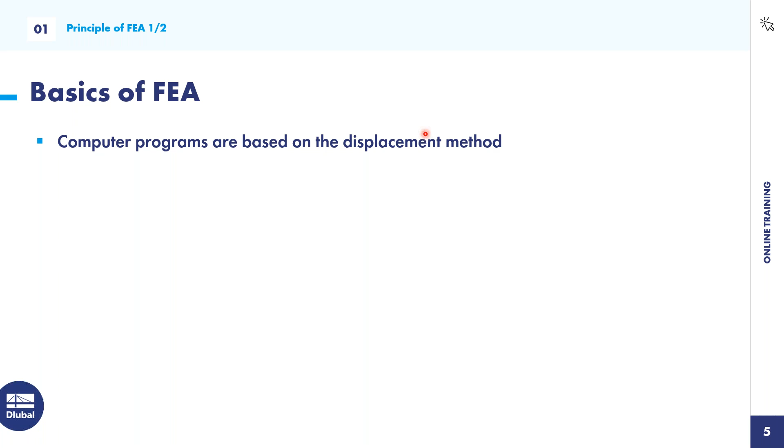Here, the FEA programs work with the displacement method. So the unknown of this equation, of this whole calculation process, is the displacement. So you calculate first of all the displacement vectors, and then you can calculate the internal forces and also the support reactions and so on.

And this analytical solution of very complex structures is in reality really hard possible. So when you want to calculate something by hand or with Excel, you are going to the limits, because it's very hard to realize realistic results. So you have to use some FEA programs, some FEA software.

So what's going to happen there? The real structures are decomposed into a mesh of finite interconnected elements. That's also the name of the finite element analysis. So the real structure is decomposed into a mesh of finite interconnected elements. We will see it later in the example.

And then on each node of this FE element, the properties of the element continuum are described. And then the mechanical behavior is described by approximation sets. These approximation sets are the secrets of every software producer, software creator. It's very complex.

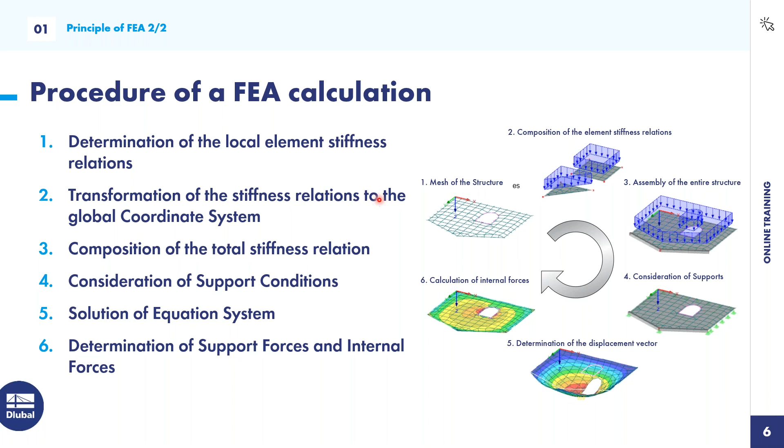This was the basic procedure of an FEA calculation. Now we are going to do this little example. First, we are going to model these three continuous plates, and then compare the results of this bending moment with a continuous beam. This will be very interesting because then we can see the different results.

Good, so let's jump to RFEM, the program. First of all, we want to create this training very interactive.

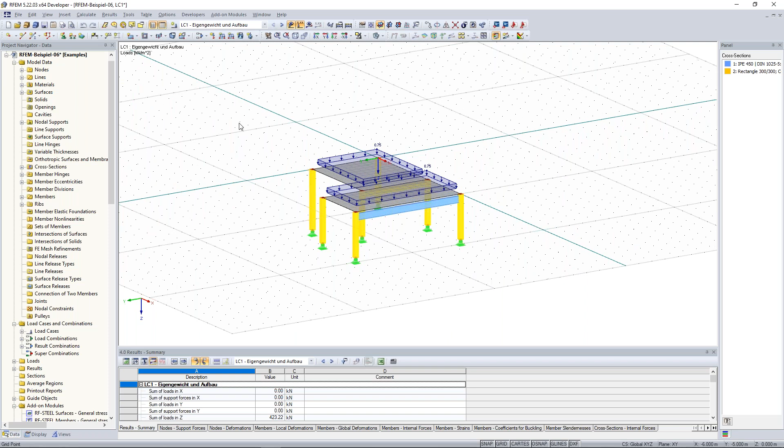Below this menu bar you see the symbol bar. With the symbol bar you have a faster and quicker access to the most common used functions. So if you want to create some lines, just click on new line and draw your lines. This is very fast. By double right-clicking I finish this insert, and it's the same with a lot of other functions.

On the left side you see the navigator. The navigator is very important for working with RFEM. You see all model data in the data navigator. The navigator generally has 4 tabs: the data navigator, the display navigator, and the views navigator.

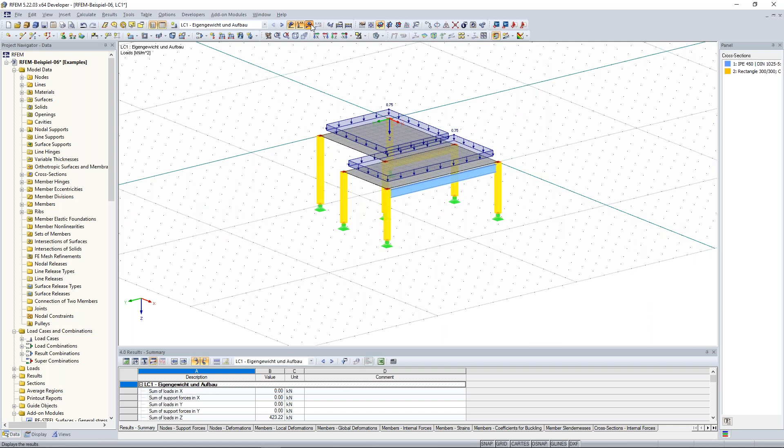When I show me the results of this structure here, I have also the 4th tab, the results tab. But I want to begin with the data navigator.

With the data navigator you have all the possibilities to have an overview of data like the nodes. So when I click on one node, the node is selected, and with right click on that I can find this node - I see this here with the arrow. It's the same with the surfaces - all surfaces I created before, I can click on that and modify them, I can edit them just by right clicking here.

It's also the same with load cases, loads, results, and so on. At the bottom you will find the add-on modules. Remember, RFEM is good for the calculation of internal forces, deformation, stresses and so on. But if you want to design something - maybe a steel column or a concrete downstand beam - you have to use our add-on modules. They will give you the designs for different materials and areas like steel, concrete, and timber structures, while RFEM is just for the calculation of deformation and stresses.

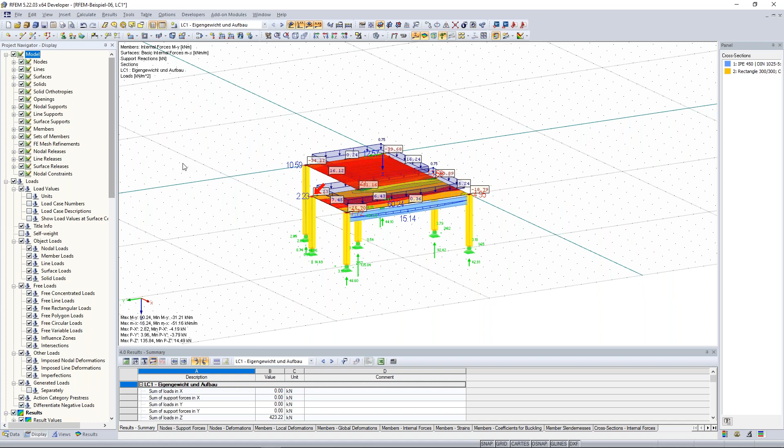The same with the loads - when I don't want to see these loads here, I have some surface loads, so I just click on loads and deactivate the view of the loads. There are also a lot of other possibilities here. Maybe when you want to show the numbering of all objects, just click here in the display navigator, go to the area of numbering, and you see the numbering of the objects.

Good, then I jump to the views navigator. It's very helpful to work with a lot of views when your model is getting bigger and more complex. So maybe it's useful to have some user-defined views. I close and deactivate the result view, and I like this view very much, so I save this view.

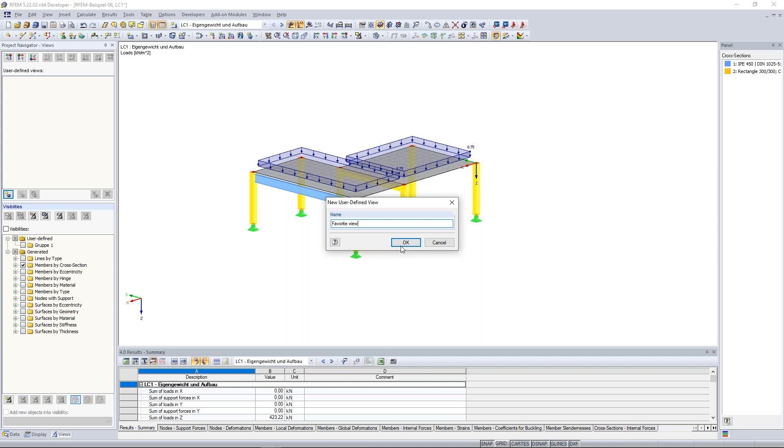I can click here, create new user-defined view, and I write 'favorite view'. During my working process I change some views in order to work better with the program and the model, and then I want to skip to my favorite view. Just click here in the views navigator under user-defined views, click here, and you jump to your favorite view.

The same applies with the visibilities. So when you want to filter something, when you want to show just the members or the columns, it's very easy when you do it here with the views. Now I want to show me just the columns, so I click here on members by cross sections, and I know the cross section of my columns is 300 by 300. So I click on the rectangle 300 by 300, and all columns are shown.

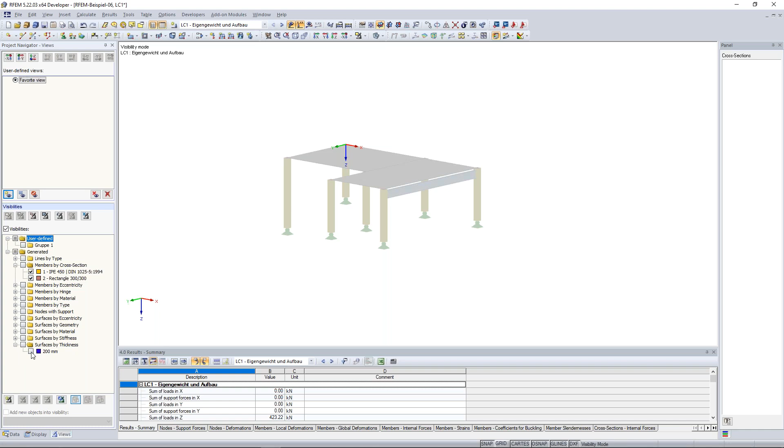When I want to add maybe this downstand beam, this IPE profile, I click on that. And the same with the surfaces. So I click here, surfaces by thickness. I have two surfaces with a thickness of 20 centimeters. I click on that and I can show the surfaces.

Okay, now to the fourth tab, the last tab of the navigator. Here I can show the results. First of all, maybe the deformation. I can show the deformation under global deformation, but also maybe some internal forces.

So when I cancel the visibility mode that I did before, I can show maybe the bending moment. So I just click here on M-y, and I see at the downstand beam here we have a nice field moment. Or when I want to see the compression forces with the normal forces at the columns, I see some normal forces and so on.

Yeah, also the support reactions. Everything concerning showing the results you can manage here by the results navigator. Good.

Something about the tables. Tables act in a similar way to the data navigator. So when you want to create something new, you can do it here just by creating a new node. The same for the lines, surfaces. So you see everything interacts with each other.

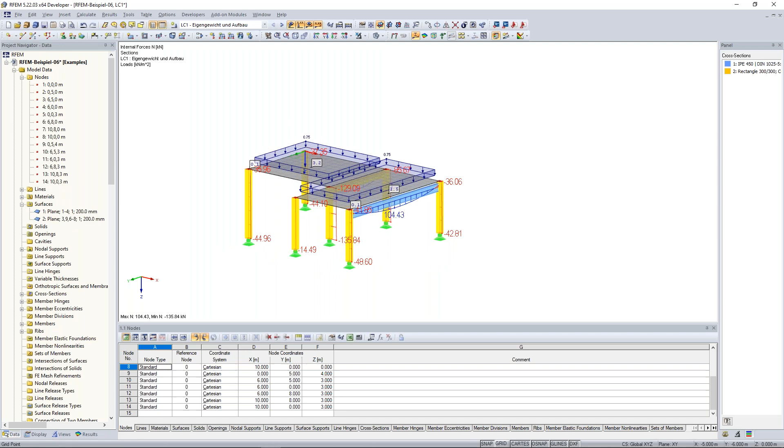So you can create a new node here in the table. You can create a new node at the data navigator by right-clicking on node, new node, or just by clicking here in the symbol bar. So there are several ways to do an insert, edit, or modification of a model here in RFEM.

The same, you have also an overview of your load cases. Sorry that it's in German, and also nodal loads, or in this case we have surface loads, so you have an overview of that. It's up to you how to use that.

Now I want to finish this chapter. Praxitelis, are there any questions, or do we want to add some information?

No questions yet, Daniel. Maybe we could show the controls, how you move, how you zoom, and how you select. Yeah, thank you for that. I forgot that. Thank you, Praxitelis.

So, of course, the movements in our program are as follows. First of all, with the left click on your mouse, you can select, you can do a selection window, and it depends from which side you do that. So when I go from the left to the right bottom corner, I select everything which is really in this selection window. In this case, it would be this column here, this nodal support, and also some nodes.

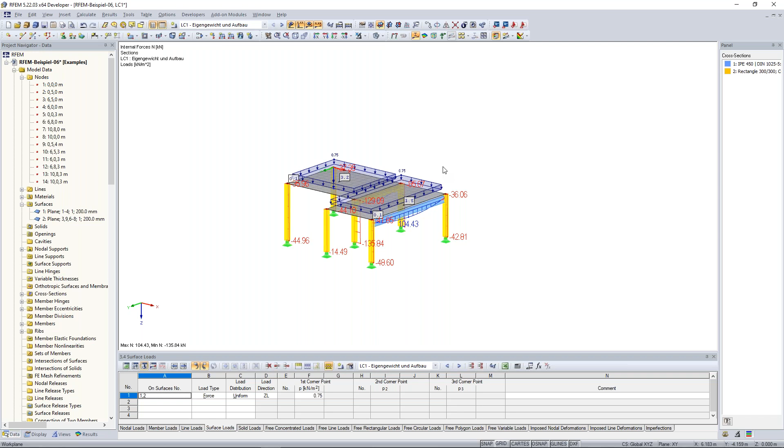Good. And also, when I want to rotate maybe this building, just press the control key on your keyboard and then press the mouse wheel and you can rotate it. The same functions you can do also here in the symbol bar with this icon: move, zoom, and rotate. You have the same possibilities and so on.

Good. Yeah, so far to that. Now I have prepared some questions for you. So let's start with this one. I want to know from you what is a discretization. We had it before in the PowerPoint presentation.

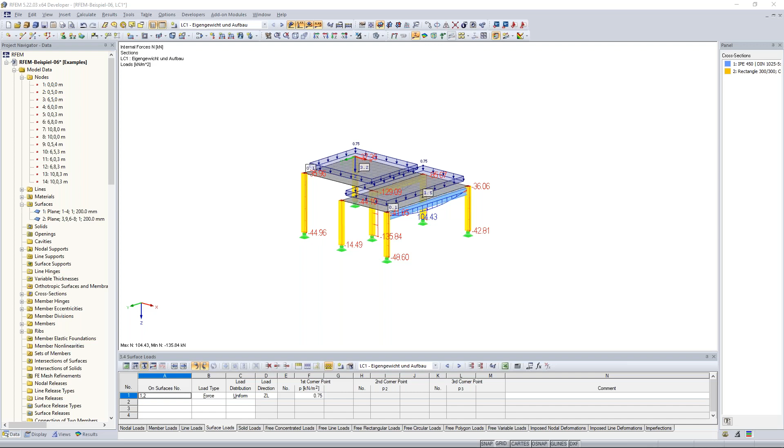Now let's start with the creation of our continuous plate. I create a new model. Just click here on New Model, or go to the menu tab and say File, New.

After that, it opens this General Data window, and here you can insert the model name. In this case, I give the name Continuous Plate. You can make a short description, it's up to you. I save this to my folder examples. You can create a new folder, a new project, or search for the right folder at the project manager, it's up to you.

For me, it's very important to differentiate this type of models. Here you have the possibility to choose different types of models, so you can create a 3D model, 2D, and different types of 2Ds.

This 2D type is especially for plates loaded by forces perpendicular to that. And this other 2D type is especially for walls or for 2D frames with parallel loads—these are plates acting by wind loads, for example, and these wind loads act parallel to the plane. Keep that in mind.

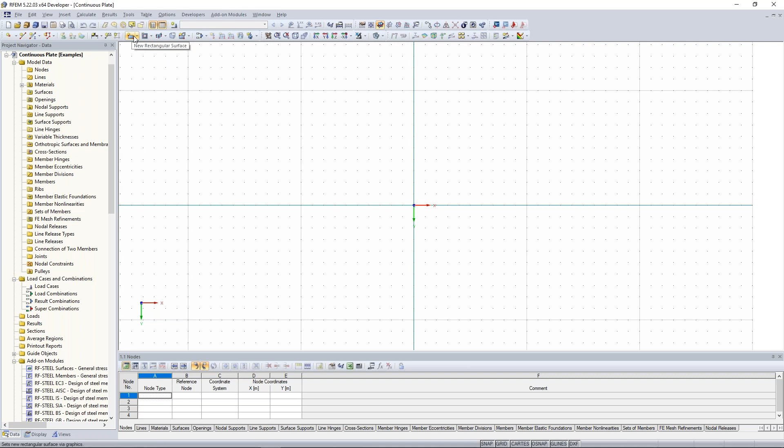My new work window is opened, and I can create this plate. First of all, I go to the symbol bar and create a new rectangular surface. I can also click on this arrow and open the different possibilities to create a surface. I click here on rectangle.

Now I choose the material concrete C30/37. For those where this concrete is not activated, you can modify or edit the material here just by clicking on this icon. You can put in your material constants and properties by yourself, or you can open the material library and choose one of these materials from the library.

So in this case, I have this concrete material. I have normal concrete, no lightweight concrete, and I refer to the Eurocode. For those who are not from Europe—in Germany, we use this Eurocode especially, and I refer to this Eurocode, but you also have the possibility to choose other concretes from different standards. But in this example I refer to the Eurocode. I choose this C30/37.

So what does it mean? The C30/37 concrete has a characteristic cylinder compressive strength of 3 kilonewton per square centimeter, and also a cube compressive strength of 3.7 kilonewton per square centimeter. So this is what C30/37 means.

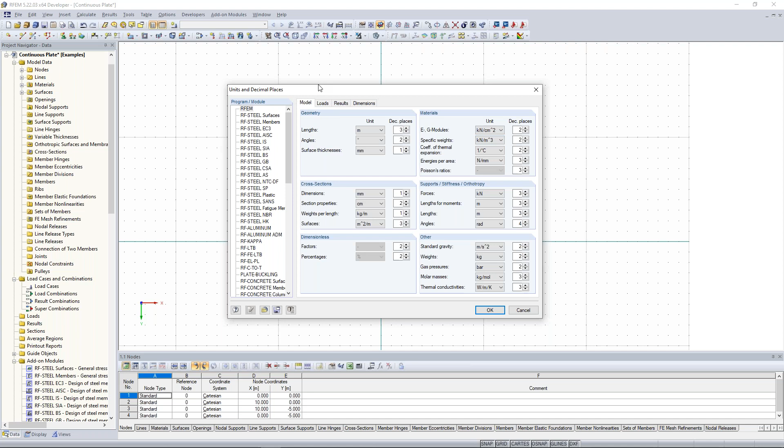I leave it like that because it's clear for me. But for those who want to change the units, just go to options, units and decimal places, and change it like you want.

Now to the next step. I want to create the same plate in order to practice a little bit more. I create a new rectangular surface again. The properties are already set, so I create the same plate again, but a little bit faster this time.

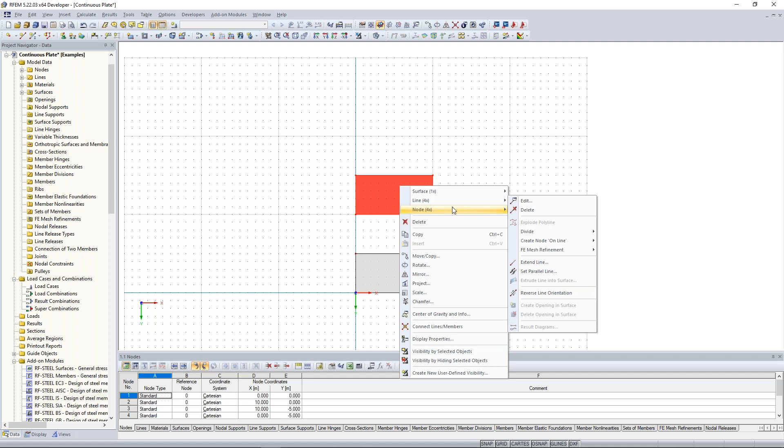Now I want to copy this plate from there to there. I do a selection window and select the whole plate, including the nodes and lines. Now the whole surface is selected. By right-clicking, I open the context menu of these objects, since there are now more of them. I have selected the surface, but also the 4 lines and 4 nodes. But I want to copy everything, so I click on move and copy.

Now I want to move this 10 meters downwards. So I select everything again, then right-click with move and copy. This time I don't want to create a number of copies, so I set it to 0. I select my displacement vector, which should be from there to there. I click OK, and it's copied from there to there.

To have a good comparison to the results of our plates, I want to create a beam, a continuous beam. So in this case, I have to create a new single member - to create beams, downstand beams, or girders, something like that. In RFEM this is always the new single member, so just click on that.

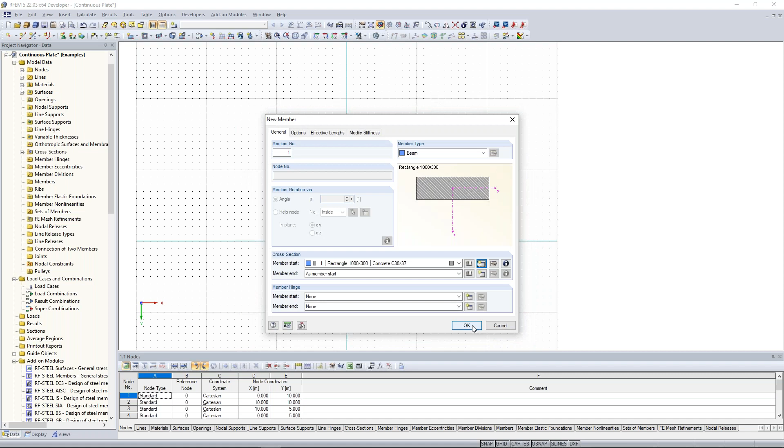I type my values: a width of 1000 millimeters and a height of 300 millimeters. The material is the same here. I just click OK, apply this again with OK, and press this also again with OK.

Then I model this continuous beam from that node here to that grid point, and close this insert also with escape or with a right click on the mouse.

Next step is that we divide these lines in order to have lines to create line supports here. I change my view a little bit. We want to create a continuous beam here, so we need an additional node to create our support, and also additional lines in order to create our line supports. So we have to do that now.

I change my view again to the front view. I click on view in Z direction, and look at this side to have this view. So what can I do? I can divide lines in order to have an additional node on this line. I click on the bottom line of this plate, this surface, right click on that, and then I can divide the line graphically by n intermediate nodes or by distance.

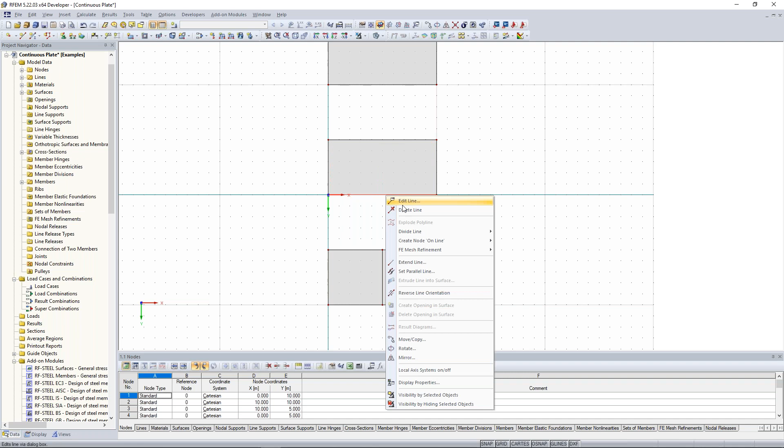We do the same again with this line. So right click on that line. I divide the line, but in this case in intermediate nodes.

Now it's very important to know these arrows. These arrows show me the orientation of the line. So every line, every member has one node at the beginning and one node at the end. This arrow shows the orientation. In this case, it shows from the left side to the right side. So this means that the line has at the left side its beginning node, its starting node, and on the right side its ending node.

So when I want to divide this into intermediate nodes, and I put 1, it divides me at the half of this line. When I put 2, I have this - I have 3 lines, so 2 additional nodes, and so on. I put the 1, and it was cut exactly at the half of this line.

I create a new line again, and I create this line from there to there.

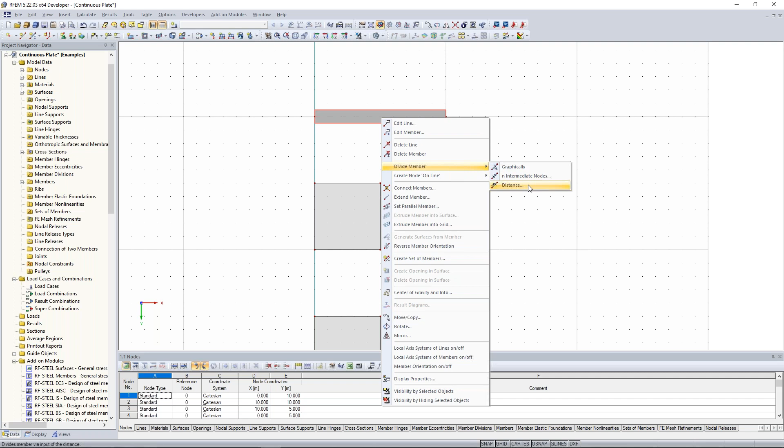Now I want to divide it by distance. Now I have again this orientation of this beam, the same again. On the left side I have the beginning node, and on the right side I have the ending node, because my arrow shows from left to right. And I want to have the division here at 5 meters. I click OK, and that was it.

Good. Now I want to create the nodal supports and the line supports. First of all, the line supports, because we want to have here a continuous plate of these surfaces. So we need new line supports. Just click here in the symbol bar, new line support, and we choose this hinged support, because when we are going to look at these supports, we can do that here - create new type of line support.

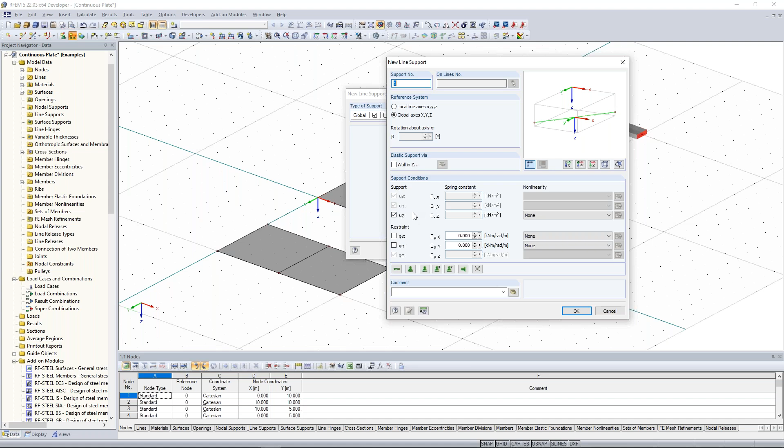We see okay, the UZ, so the support in UZ is activated. What does it mean? So when I activate some of these things here, restraints and supports, I block the deformation, I block the displacement or the restraints. So I want my support to carry vertical forces, so I have to block the displacement in the Z direction, and this is also the reason why there are going to be vertical forces. I press OK.

Now you can choose the local or the global. It's the same, you see it here at the arrows. Click OK, and now click on these lines here.

The same at the beam, but in this way I do it a little bit differently. So I select first of all this beam here, this part of beam, because I want also to create here at these nodes this nodal support. Now I go to the symbol bar and click on new nodal support. And here in this case I choose again the hinged nodal support, click OK, and you see here the nodal supports.

And for that point, for that node, we need a different nodal support, because at the moment it's possible that the beam has torsion, and that it can rotate along its own axis, and this is something we don't want to have. So I have to create a different nodal support.

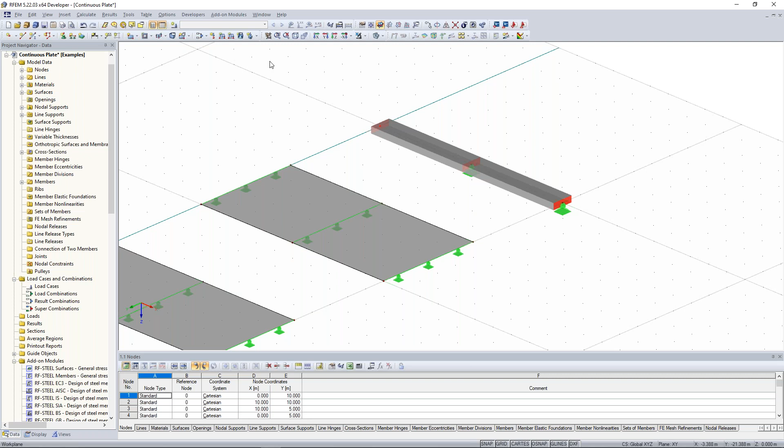So here again, new nodal support. I click here on create new type of nodal support, and I have to activate this phi x, in order to block the rotation about its own axis. This is very important. Click on OK, again on OK, and we have this.

Good. So much to the modeling of supports and plates.

Now we are going to put the loads. One important point: in order to add the loads, it's important to first have your load case, because every load is referred to a load case. So in this case, we have to create first our new load case. Here at the symbol bar, just click on new load case.

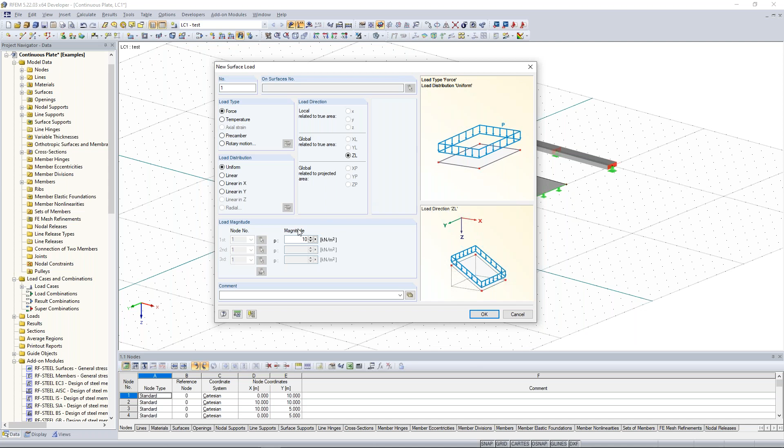Now I can put the loads on the surfaces and plates. So here I put the new surface load. It opens a new window, and I have the load type force, and the load distribution should be uniform, not linear - uniform, constant. Because we are working in the 2D work plane, so we have a 2D object, 2D type, the load direction is only possible in the global Z direction. And we have a magnitude of 10 kilonewton per square meter. Again click OK, and I choose the surfaces here.

Now I have to create it also for the beam, so for the member. Keep that in mind: we have in RFEM two possibilities of line or distributed loads - the member load and the line load. Because we have here a member, it's very important to really use the member load for that. The line load is for the lines of a surface, like wind loads on edges. So when you want to put loads on edges of surfaces, plates, or shells, you have to use line loads. But if you have really members with cross sections and so on, you have to use member loads. So keep that in mind, please.

I click here on new member load, put here also the same load parameter, 10 kilonewton per meter, and click OK. Good, so far for the insert of loads.

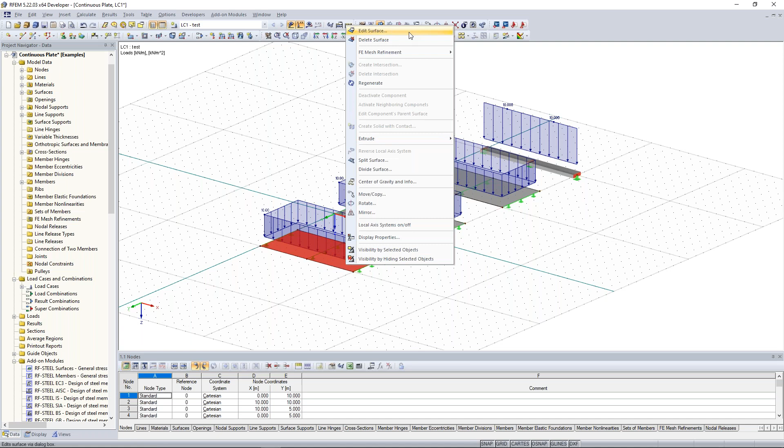Okay, of course. We have different stiffness types of plates. When I right click on one of these surfaces here and click on edit surface, you see here on the right side the surface type. First of all, the geometry - in this case, we have a plane. So a plane is really when you have something in one plane. And the stiffness - we have here different stiffness types.

First of all, we also have the possibility to have maybe an orthotropic stiffness. So here at the bitmap, you can see different types of that. When you click on the right icon here, you can edit the parameters of stiffness, and then you see also the stiffness matrix, and you can modify that. There are so many possibilities to do that. So when you want to have constant thickness or some effective thicknesses, you can modify these stiffness elements, and then you see it here also in the material properties, and here at the stiffness matrix.

And this was what I told before at the beginning of our PowerPoint presentation - at each node, this different type of stiffness matrix is what we are considering for the calculation. So when you want to modify that, you can do it by your own way. That's possible.

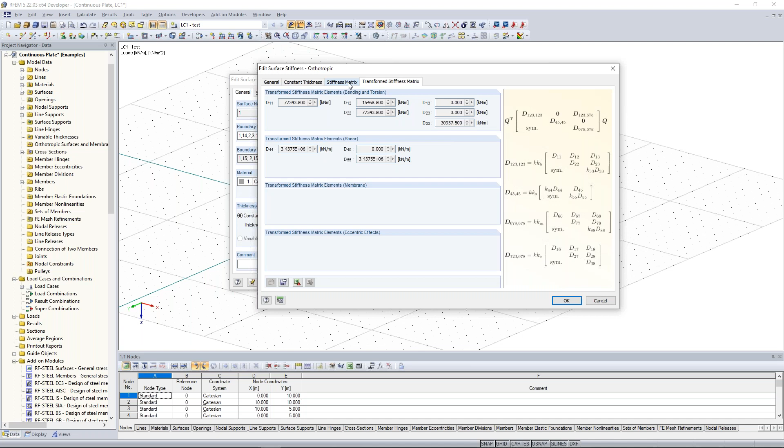Then we also have the possibility to have glass stiffness - there you have to use an additional program, RF Glass, because it's also a different stiffness type of plates. Also laminate, so when you want to do some timber structures, especially cross-laminated timber, very famous - you can do that here by creating also new stiffnesses. It's similar, so here you also have to use an additional add-on module of our software, and with the help of the add-on module, it will calculate the stiffness matrix. You will see it later, and you can also make it rigid, so without deformation, infinite stiffness. But in this case, we leave it at standard. Good, another question?

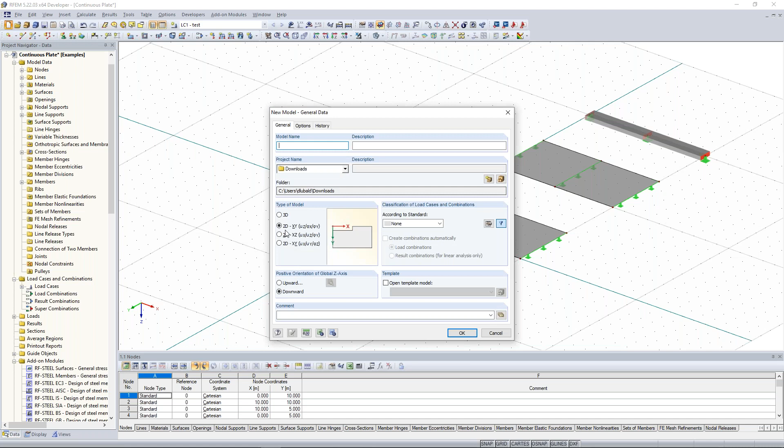I can show it to you. I'll do something new - you don't have to do this, I just want to show it to you.

Look, I create two lines. They are acting independent from each other. So this line is for itself alone, and this line is for itself alone.

When I want them to have one point here, one node, so that they are acting with each other, I can create an additional node here in the symbol bar by connecting lines or members. I draw one selection window, and here a new node was created.

And now you can also see this line is acting with this line. This is very important, because when you want to calculate members and you don't want them to act on each other, you have to model it like that, to have no additional node here.

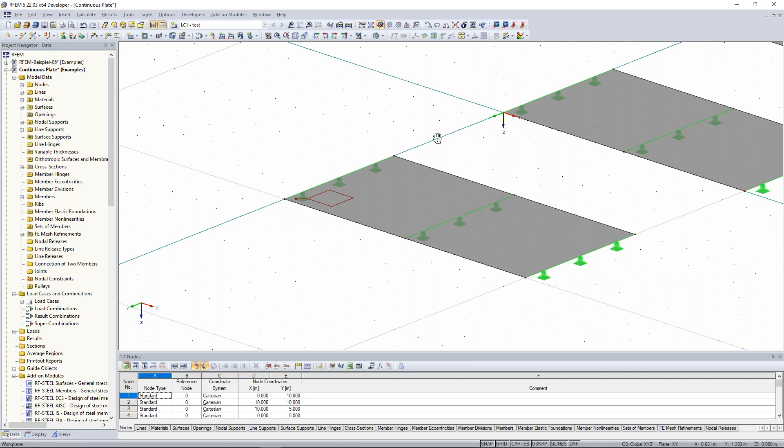We can do the same for the second surface. Here again, FE mesh refinement - go again to new, create a new FE mesh refinement, and here we put a value of 0.5 meter. Click OK.

Now I told you that you can do the same creation of model objects and so on also with the help of the data navigator. I want to do that, so I jump to the data navigator, go to the area of FE mesh refinements, and when I open this structure here, I see the already created different FE mesh refinements.

I want to create a new one. I click here with the right click to new FE mesh refinement, and I refer first of all to a surface - I click here this surface, so the third surface, and then set a target FE length of 0.1 meter. Good.

In order to see the results better, it's good to have a comparison of the internal forces of that beam and also of the internal forces of the plates. So in order to handle this better, we have to create sections.

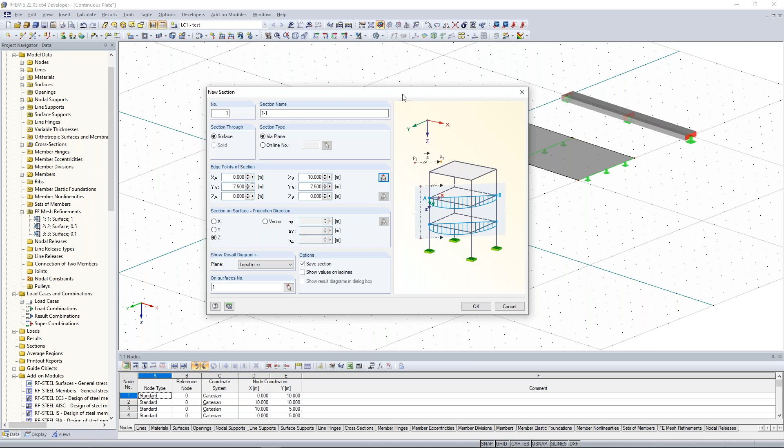I refer just to surface number one. The edge points of my section are the middle lines of the outer lines of this plane. The section on surface, the projection direction is in global Z.

I press OK and do this again for the next surface. So again here on sections, create a new section. The section name is 2 minus 2. The edge points of the section should be from there to there, and my surface number is the second one.

And again, create a new section, 3 minus 3. Choose the right points and also the right surface, and then click on OK.

Good. Now everything is ready for the calculation, so we can calculate it, and this is what we are going to do now. Just click on the menu bar, calculate, and you can calculate everything, or when you have different load cases and want to show one special load case, you can click here, choose the load case, or just click here in the symbol bar, calculate all. So I click here in the symbol bar, calculate all.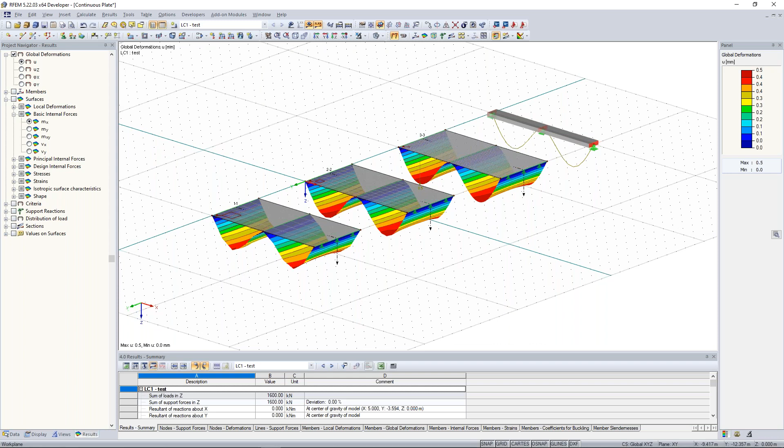So first of all, you see the global deformation. But this is not so interesting. You can watch the deformation in some way, but more interesting are the internal forces of the member here, and also the internal forces of the plate.

So I activate it, I click here on surfaces. Now I see the basic internal forces mx. Mx means every surface has a local axis system. By right clicking, I can show the local axis system of the surface. Right click on the surface, local axis system on/off, and I can show the local system. The basic internal force mx tells me that these bending moments, these internal forces, are along the local x-axis.

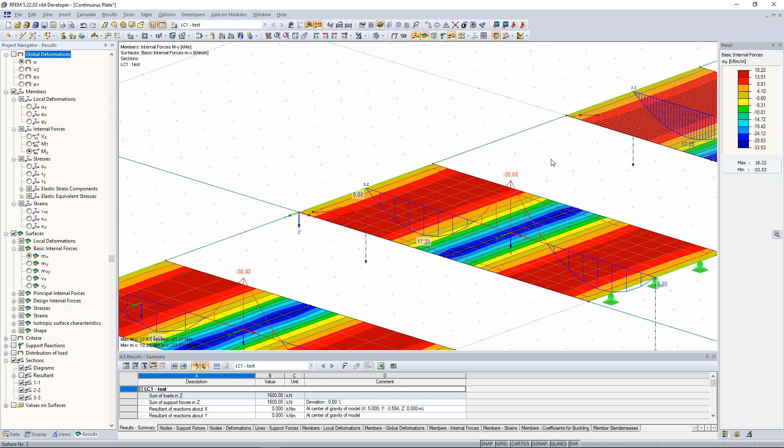Now you can also see the different results of the sections, and also the different sizes of the FE mesh, because here we have 1 meter, so every 1 meter there is a result, here 0.5 meter, and here 0.1 meter. What I want to show you is that it depends which FE sizes you have, because it can cause different results.

One important point is also when you go to calculate and the calculation parameters, you have the possibility to activate shear stiffness of members. Especially in study, when you want to calculate something by hand, you may have a continuous beam, and with the help of the force method or the displacement method, you can calculate your internal forces. When you want to compare your results with RFEM, it's very important to keep in mind that RFEM always calculates with shear stiffnesses of members.

That's the standard, and this is maybe also the reason why you don't get the same results as in RFEM when you compare your beam results with RFEM's beam results.

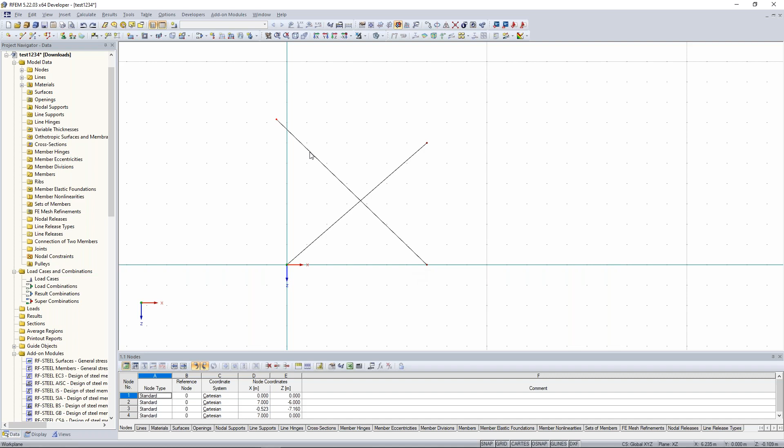Let me go to my test model here. I create some new lines, and you want to divide this line by Divide Line and then N Intermediate Nodes. I think you meant this method, place new nodes on the line without dividing it. Yes, this is also possible.

Like I said before, you can create new nodes here, but then the node doesn't have any behavior on the line, so it works alone. It doesn't have any influence on that line. When I divide this line in one intermediate node, we get a new node in the middle of the line, but look, this line wasn't divided. And when I create a new node from there to there, these lines wouldn't act on each other. It's the same when I would go through here.

So if I had cross sections or real members here and put some loads on them, they wouldn't have an impact on each other. This is something you have to know.

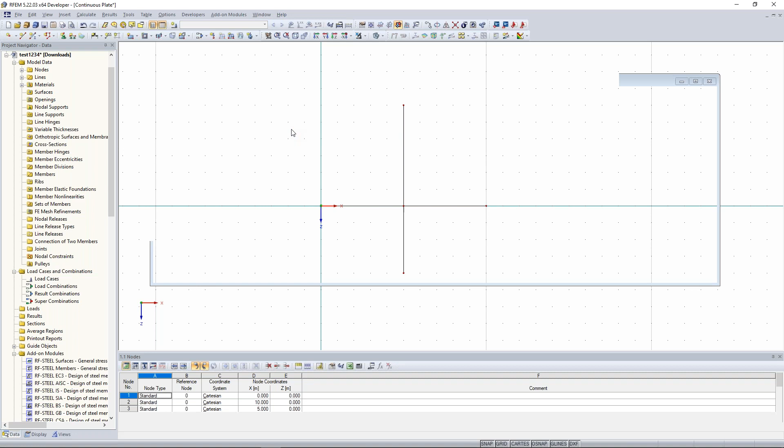Someone is asking, could you talk about connections in the nodes when 3 members are connected? Sometimes RFEM warns about instability. I think this can happen when you have hinges. Let me explain with this example.

I create now very fast some cross sections, some IPE profiles. Okay, look, here we have this very small thing, let me make it a little bit bigger. Good, so I make one continuous beam.

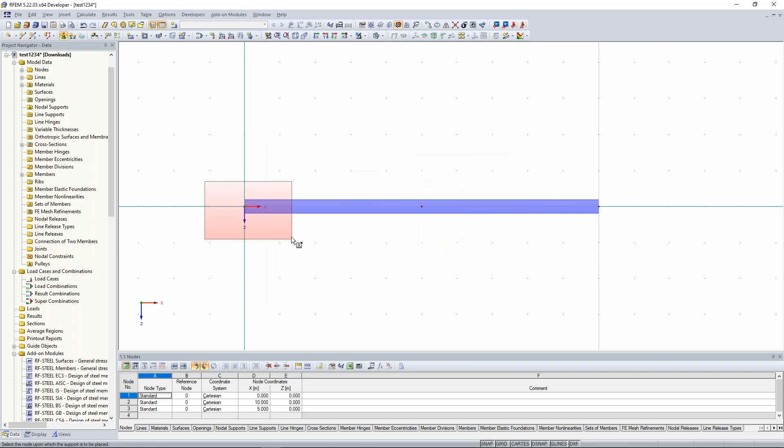So I divide this again, maybe a little bit by distance, here in the middle. And I make some sliding supports, nodal supports, and now I want to have a hinge here, so I have to divide it again. I create a hinge here.

So in this case, in RFEM, we have to create member hinges. I go to this beam, edit member, and create a member hinge, normal moment hinge. I set the rotational release MY, and create a hinge here. Now the whole beam is statically determined.

And if you had an additional hinge here, like this, then it would be unstable, because you'd have a hinge chain with 2 hinges, and that would be unstable. So keep that in mind when you have 2 parts of members, it's okay to have just one hinge to consider the zero moment here. 2 hinges would cause a hinge chain.

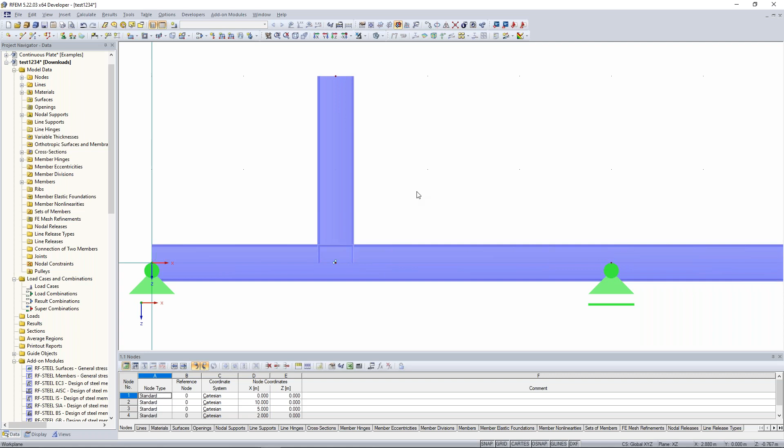And when you have 3 members, so I model one member again, and if you want a hinged joint here, just click on the upper member and create a new hinge, and then you have the hinged joint. But if you did an additional hinge at this beam here too, then you would again have a hinge chain. So the same number of hinges as the number of members would cause a hinge chain. I hope that the question was answered.

Due to the hinges, exactly. You have to consider it in the right way. And also, when you create hinges at the nodal supports, this is also false. This is not correct, because the nodal supports at the end or at the beginning there are hinges. Keep that in mind.

Good, then I would say let's move forward. Praxitelis, okay, some additional things, or maybe? I think we can carry on. Okay good, mm-hmm, okay.

So much to the continuous plate in comparison to the beam. Now I have prepared a test for you. So what happens if the shear stiffness is activated? Please answer that.

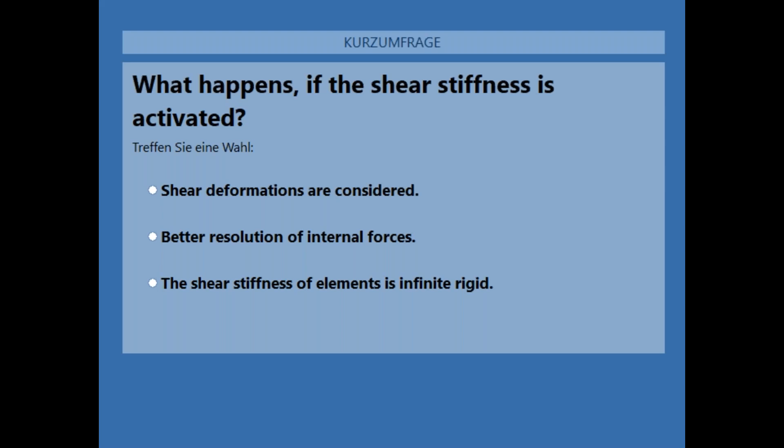Good, maybe I will wait for some more answers. Just 60% have voted. Okay, good, I close this poll. And the right answer is the first one.

So shear deformations are considered when the shear stiffness is activated. So I get additional deformation because we activate also shear forces due to the activation of the shear stiffness. Good, so much to that.

Now again to the theoretical part. I jump back to my PowerPoint. And now I want to tell you something about the plate theory, very important in my opinion. I don't know how you learned this in your studies, but I learned it this way. So we have two theories of beam calculations: on one side the Bernoulli beam, and on the other side the Timoshenko beam.

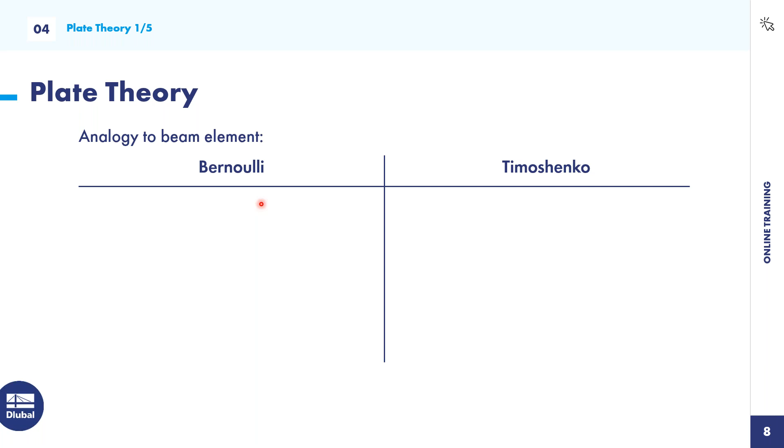So what does the Bernoulli beam say to me? In this case, the cross section remains in plane, and also the cross sections remain perpendicular to the member axis. These are the assumptions of Bernoulli. And what's very important, like I said before with the shear stiffness, Bernoulli doesn't consider shear deformations. So we have rigid shear stiffnesses.

That's also the reason what you learn first, in my opinion, in your studies, when you calculate beams and girders, you don't consider the shear deformations at first. Because a lot of books say to use some general formula in order to calculate these continuous beams a little bit faster. And that's also the reason why we don't consider that.

And on the other side we have the Timoshenko beam. Timoshenko assumes at first the same assumptions as here: the cross section remains in plane, and the cross sections remain perpendicular to the member axis, but Timoshenko considers the shear deformations. So the shear stiffness is limited, it's not endless, it isn't rigid.

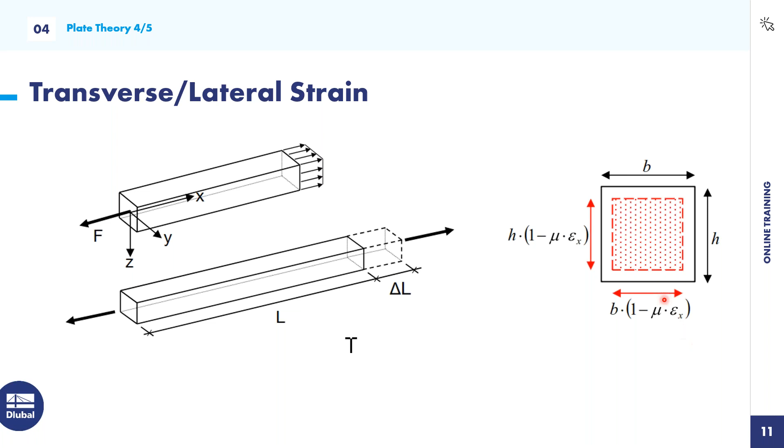Kirchhoff supports good results when I have thin plates, so when I have really normal slabs in the concrete calculations of buildings, so 20 up to 30 centimeters, the results are okay. But you have to consider that these are just pure bending load bearing capacities, so no consideration of shear forces, and the calculation is also just a simplified approach.

When I look at the Reissner-Mindlin theory, it can be used for thick plates but also for thin plates. Keep in mind that you also get very good results when you use Reissner-Mindlin for thick and thin plates, because the component of shear influence is relatively high, and if we neglected the shear forces, the results wouldn't be good and the errors would be too high. In addition, we have a higher order approach, and because we're considering shear deformations, we also get more accurate shear forces. So to summarize, in my opinion it's better to always use the Reissner-Mindlin theory, but it's also good to know the other theory, Kirchhoff, and to know the differences between them.

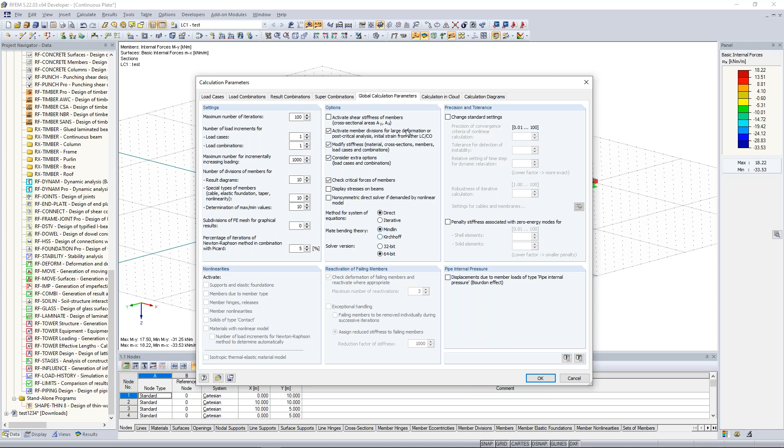Now I'll show you in the program. When I jump here to the model again, and go to calculate and the calculation parameters, I have the possibility to choose one of these plate bending theories. In this case, the standard of RFEM is always Mindlin, so maybe you remember these results here. I changed to the Kirchhoff method, the Kirchhoff theory, and I calculate everything again.

You see the different results of the internal forces here, of the bending moments - they're a little bit different, so keep that in mind. If I made this surface bigger, with a greater thickness of this plate, the results would be more different.

Okay, good. So much for the plate theory.

Praxitelis, are there any questions concerning this chapter? Just give me a sec, because I was answering questions. Okay, sorry for that. No problem. Someone is asking, is there an error showing any locking happening in case of occurrence? I don't quite understand the question. Me either, sorry for that concern. Maybe I can answer the next question.

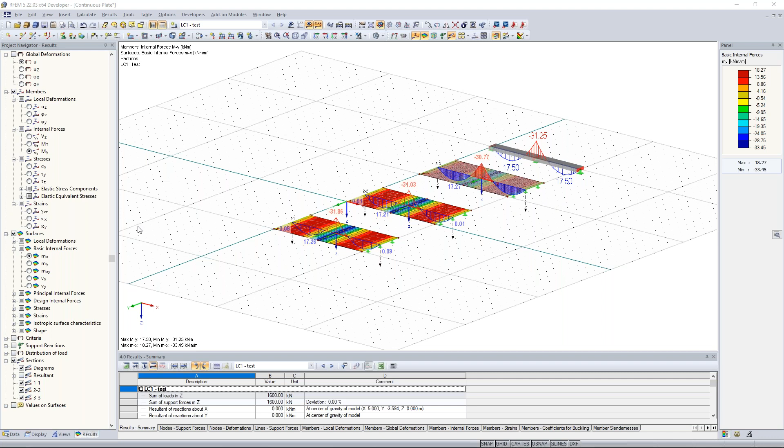Maybe you see it here again. You have 3 different plates with 3 different FE mesh sizes, and the difference between those results is not so big. So calculating with a greater FE mesh could be a good approximation to the exact result of this beam. So it's up to you how to discretize, how to set your FE mesh sizes.

Okay, what are the 4 different things? I mean, what is the difference in the 4 things? So here in the surfaces we create. Okay, I'll tell you the difference.

We create 3 different types of FE mesh sizes, so FE mesh refinements, and I wanted to show you the different results in comparison to this beam result, to this member result, because when you calculate beams and members, the results are mostly exact, because it's easier to handle, to consider in the stiffness matrix. But if you calculate surfaces, plates, shells, there will every time be an approximation to the right results - there will never be the exact solution. Please keep that in mind.

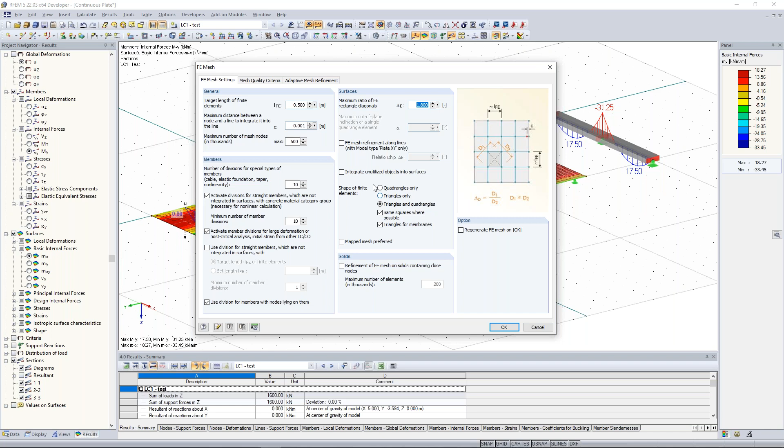Concerning the ratio of FE rectangle diagonals, you can do it here by delta D. You can adapt and modify this here. And when you want to say, okay, I just want to use triangles only, you can change it here. Please, here you can do that. Okay, good.

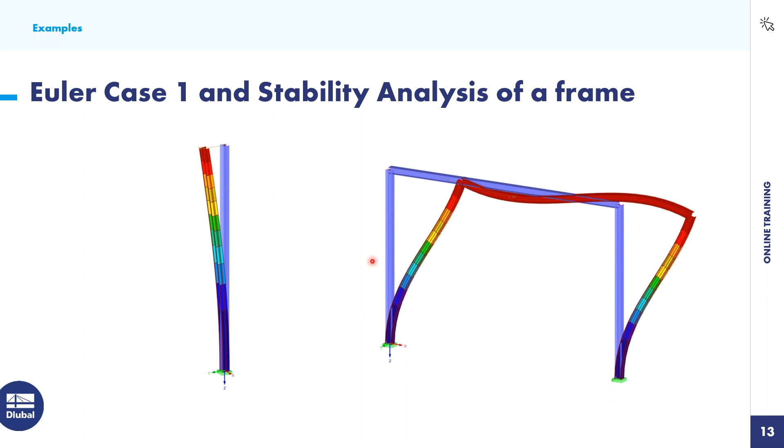Now I jump back to my nice PowerPoint presentation. Now we are going to do this Euler case 1, so we look to the stability analysis of this clamped column, and then also to this frame here.

So I create a new model. I enter the name Euler case 1, and now it's very important to have a type of model in 3D, because we want to look at both sides of buckling - both eigenforms in both directions, and that's why I do that here.

So again, I want to create one member. Keep in mind, in RFEM, it's also possible to create members and beams, columns, and so on. So I click here on New Single Member. I click here on Create New Cross-Section for Member Start, and I choose this one, this HEB profile.

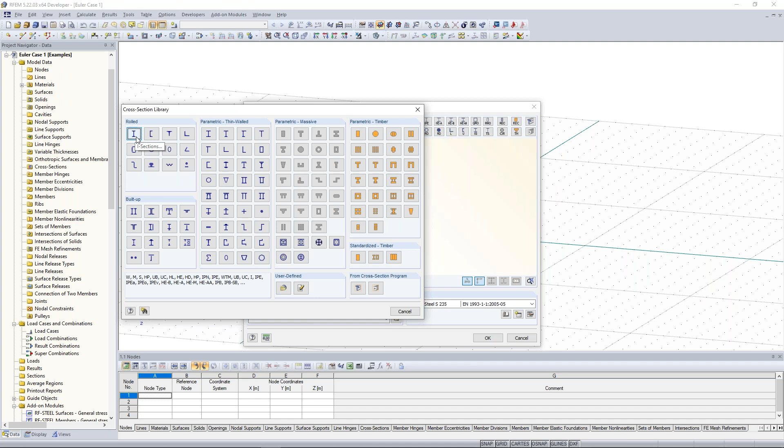For those who can see them, you can just click here on Import Cross-Section from Library. And here you have the possibility of a lot of different cross-sections. I choose here the I sections. Now you have here the possibility to choose the right manufacturer and maybe also some different cross-section shapes, but I leave it as normal.

So I choose here the HEB - in Europe it's very usual, this profile. I choose this HEB 300 profile, click on OK. Then I click again on OK, and I apply this again with OK.

Now keep in mind, when you use the model type 3D, you will have different work planes. In this case, I have the work plane X, Y. And in this case, I can just model it in this work plane. So when I want to create here maybe some beams, it's not possible to do that into the height.

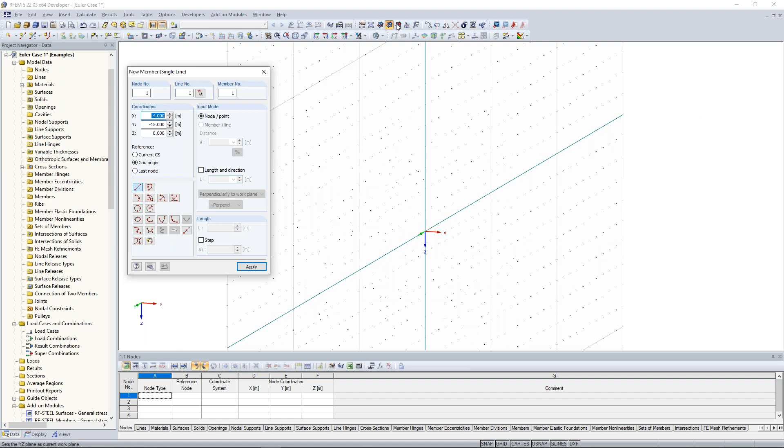So I delete this again. There are two possibilities to do that. First of all, to change the work plane so that I can model my beam upwards. Then I have this beam here. Or when I delete this again and leave this as this work plane, I have the possibility to create my member perpendicular to the work plane.

And in this case, it should be 10 meters high, so I put there a value of 10 meters. You see maybe also the member here, the column, but in the wrong direction. I want to have it in this direction, and I put it like that, and I have my beam here.

Good, now next step is to put there some supports. I want this as a clamped node here, clamped bearing. So I create here a new nodal support. First of all, I select this node here, then I click on new nodal support, and then I say rigid, so every deformation and every restraint is considered. Click on OK. Yeah, and this is my Euler column number 1.

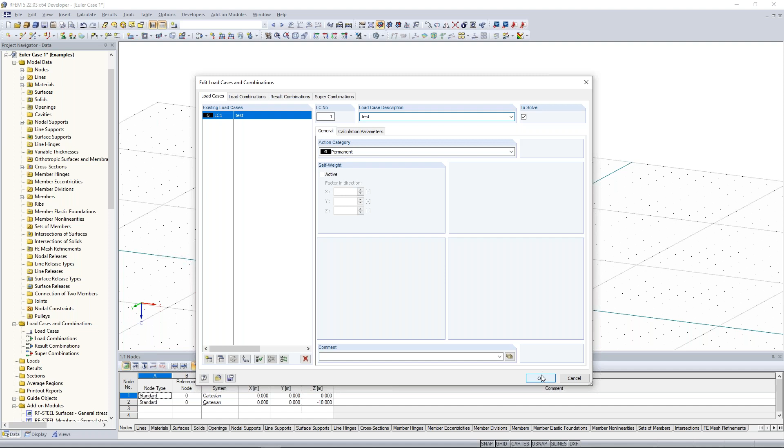Then I create this new nodal load. Now I want to have a compression force of 100 kilonewton and also a horizontal load of 20 kilonewton. Here you can refer to the directions of the nodal loads, also with the help of this bitmap and also with the help of this global coordinate system. Click on OK.

Select this node here and you see the different nodal loads. So now I want to show you a really important thing. I changed a little bit my view, so in the reverse Y direction, and I calculate now. I click here on calculate all.

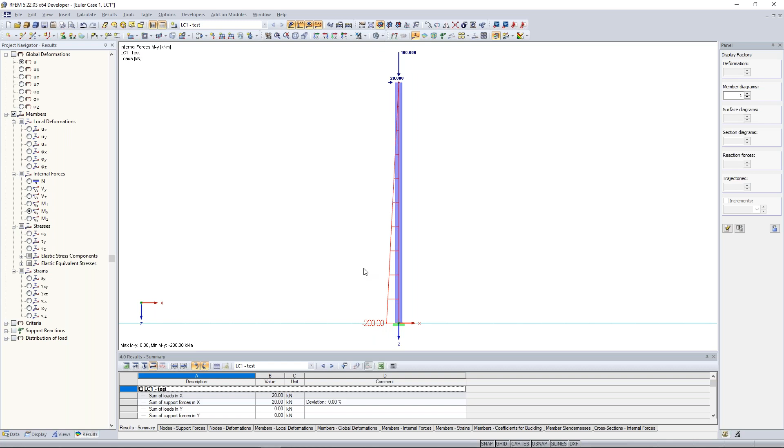And now you can see here the different internal forces. So of course the bending moment is here minus 200 kilonewton meter. I think that's clear. Also the compression force of 100 and also the shear forces. But when you look to the deformation in the global X direction, it's 127 millimeters.

Now I want to show you one important thing: the calculation after the first order theory, and the calculation after the second order, or the P delta. Really important thing. So I open the load cases and combinations, and I want to show you the differences concerning these two calculation methods of analysis.

Generally the load cases are analyzed or calculated by a geometrical linear analysis, but load combinations, for example, by the second order analysis. Maybe you know that also under the name P delta. I want to show you the differences between these two methods.

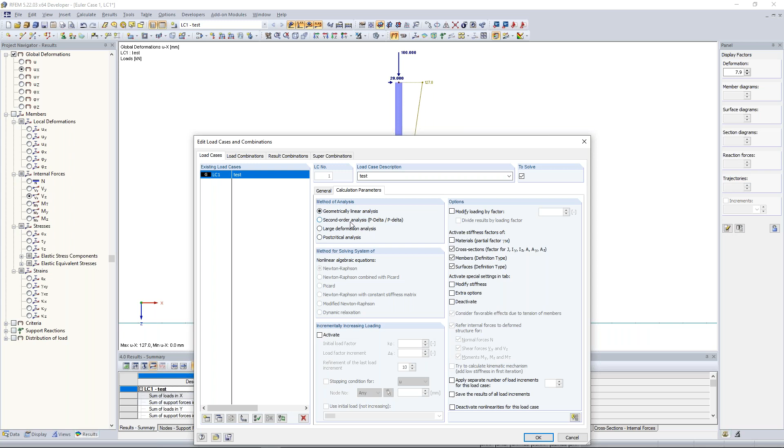The second order analysis, when I choose that and calculate it, will make the equilibrium equation of an undeformed system. First of all, we had the first order, the geometrical linear analysis. There we make the equilibrium of the whole structure at the undeformed system. And there the P delta method says to me that we make this equilibrium of the whole structure at an undeformed system.

No, sorry, at a deformed system. The first order says we make the equilibrium of an undeformed system, and the second order, or the P delta, says to me that we make this calculation on a deformed system. Sorry for that. Okay, now look to the deformation in the horizontal X direction.

This is 137 millimeters. And now look to the bending moment. There we get an additional bending moment of 13 kilonewton meters. And when you ask where these additional 13 kilonewton meters come from,

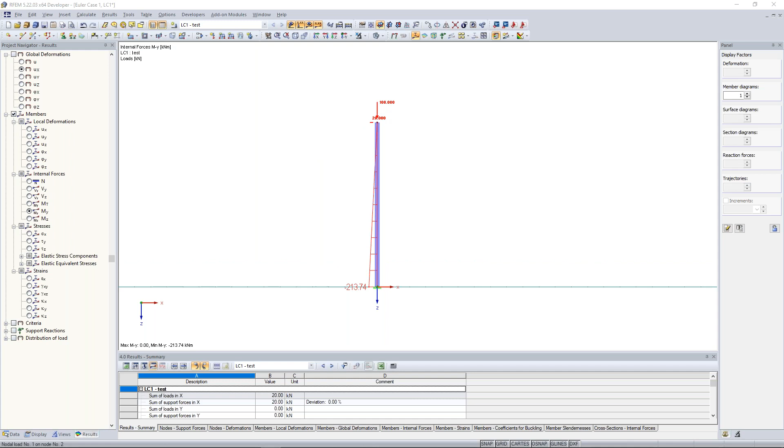Good. Now I want to go ahead in order to show you the stability analysis. So I change this nodal load. I leave just the normal compression force of 100 kilonewton. I delete this horizontal force.

And I activate here on the left side at the add-on module here the RF-Stability. For you students, when you use the student version, you have access to all add-on modules of our software. So I open this here, and now it opens a new window.

What does RF-Stability do? The stability analysis calculates, with the help of the eigenvalue method, the different eigenforms and also the different eigenvalues. Maybe you know Euler - he was a mathematician. He calculated different cases and determined, okay, this is my critical load factor, this is my critical load, and these are my critical lengths. This is something RF-Stability does in a similar way.

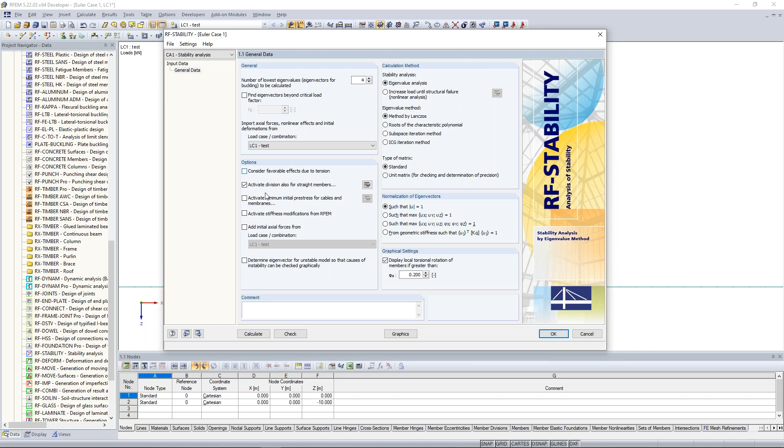So in order to get the different eigenforms, the different buckling cases, I deactivate here the minimum initial pre-stress of cables and membranes - we don't have that - and also deactivate this. But now, very important, we activate the division for straight members, because every member is also divided internally by RFEM, and there we have to set the minimum number of member divisions from 2 to 10. This is very important to do. Click on OK.

Let's calculate this thing. We get a critical load factor and a magnification factor. What does the critical load factor mean? This is the factor you have to multiply the load by in order to get an unstable system of your model. So when I multiply this factor of 4.4 with 100 kilonewton, I get a nodal load of 440 kilonewton, and my system is going to be unstable.

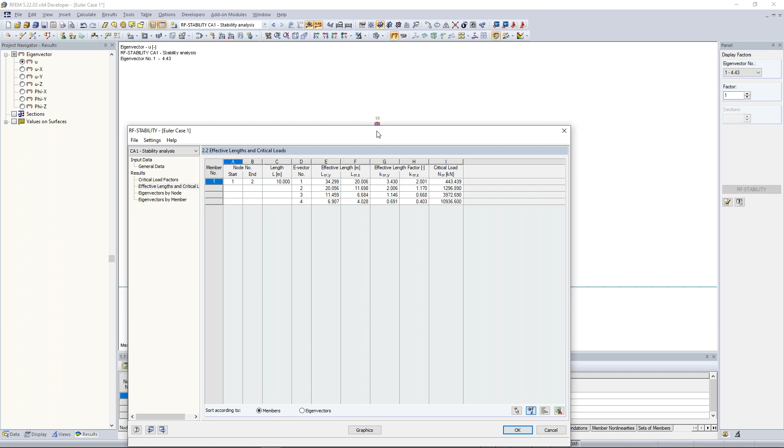Now I want to show you maybe the different eigenvectors. Let me show this eigenform a little bit better. So I go to the display navigator. I click here on deformation, members, and show me the cross-section colored. Now you see the first buckling case, the first buckling form of this column. When we zoom in a little bit, I think that's very clear. We have our Euler case 1, so the buckling form, the eigenform looks a little bit like that.

I think that's clear. The first case when this system will become unstable is that the column buckles around its weak axis. When I show the local axis of this member, I see here this y axis, and here this z axis and the local x axis. The weak axis, or the weak cross-section property, is the moment of inertia of this column around its weak axis, so around its local z axis. This is also the reason why the column buckles first around its weak axis, around its z axis.

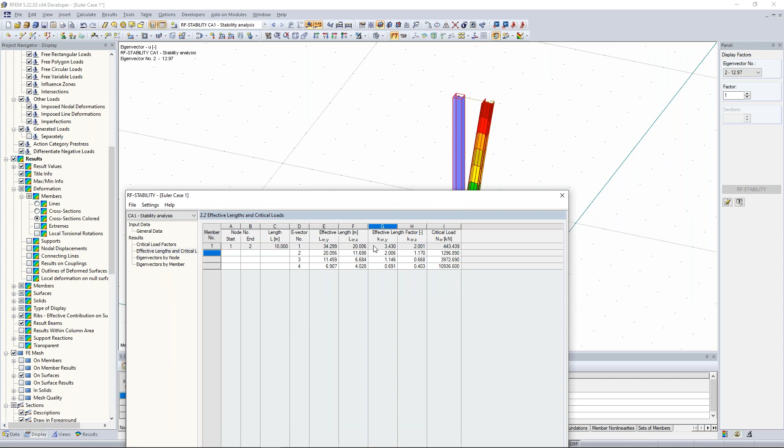Let's jump again back to the RF stability and let's look again at the effective lengths. You see the effective length factor here is 2, and here 2.006. When you wonder why isn't it exactly 2, because Euler said the effective length factor is 2, so we multiply the first length of this column by this factor, and then we get the effective length, the critical length. When you ask yourself why it isn't exactly 2, this is because we considered the shear deformations, so the shear stiffness.

When I go back to these options, to these calculation parameters, and I don't consider the shear stiffness of members, and calculate everything again, I get the exact effective length factors. So I jump back to this RF stability, and you see the effective length factor is 2, and also the effective length.

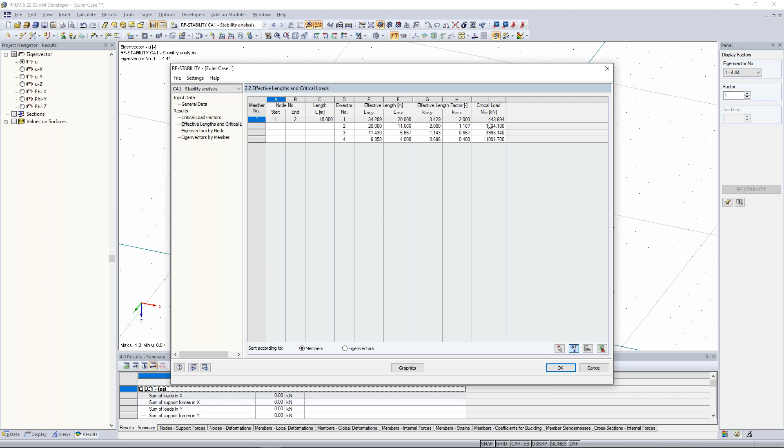Good, so much for the stability analysis of the Euler case 1. Now I want to show you what happens when you get a critical load of more than 443. So we have here this nodal load of 100 kilonewton, and when I put there a value of 444 kilonewton...

...and I calculate it with the P-delta method, so I consider the second order analysis, you will see that my system will be unstable. I calculate it, and you will get this calculation error, with this description of the error: that the stiffness matrix is singular, the model is unstable, and so on. Because we have a normal force of more than 443 kilonewton, because our nodal load is higher than the critical load. This is one thing I give you as a hint - please consider that. Okay, good.

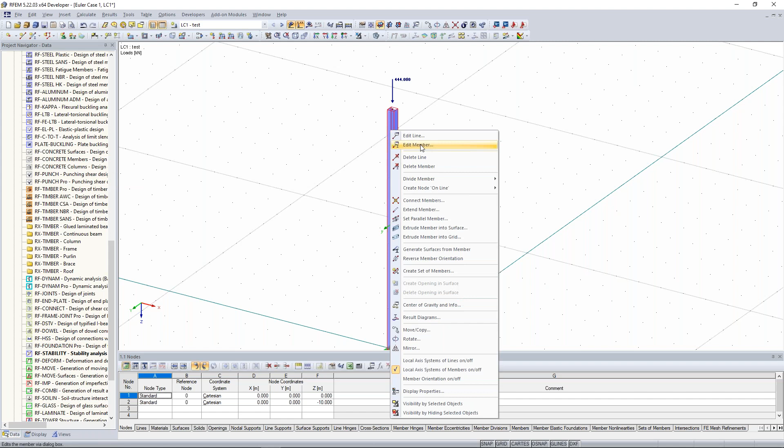Because we have also our load at the... I don't know, Praxitelis, do you know the English word for Schubmittelpunkt? Torsion middle point, maybe, I have to look it up. Shear, don't know. Center of thrust. I'm sorry for that, because I have to look up one English word. Maybe I find it there.

Someone is saying inflection point in the chat. Center of gravity, inflection point - that could be possible, yeah. So because the loads, if I have some nodal load like here, it acts on the center of gravity or inflection point of the cross section. And this is also the reason why we don't have any torsion.

So normally in RFEM, the loads are acting on the center of gravity or inflection point of the cross sections. Okay, other questions? Okay, just give me a sec.

Is it possible to do calculations in RFEM based on Saint Venant's principle of elasticity? It's at 11:15. At which time? Exactly, okay, yeah.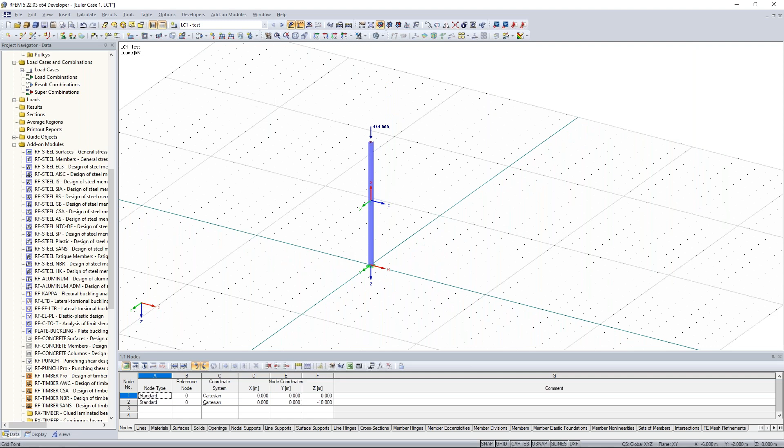All right, okay, good. So at the end, maybe I have something for you. I have a quiz for you, so please answer this test for me.

Most of you have chosen, so I close this poll here and show you the result. Yeah, most of you were right. The critical load factor specifies which factor can be used to increase the load until the system will collapse. Good.

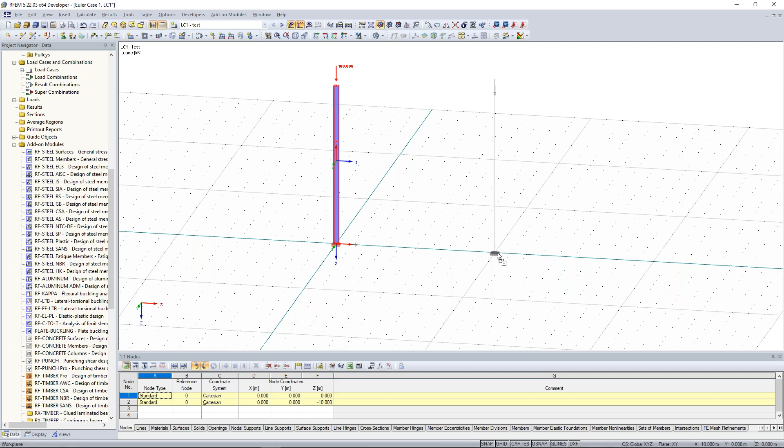So let's go ahead with the frame. There we do the same. So I change here the nodal force from 444 to 100, and I copy this column with the help of my favorite function, drag and drop. So with pressed Ctrl key and with the pressed left mouse, I copy it from there to there, 10 meters along the x-axis. Now I have two columns here, but I want to change the height of these columns.

So to change the coordinate of the nodes, it's very easy to do that. Just select these nodes, then right click on node, you can edit the coordinate of the Z, yeah, and I put it to 6 meters because I want to have this column 6 meters high. So I change it here and automatically the program will set the height of these columns to 6 meters.

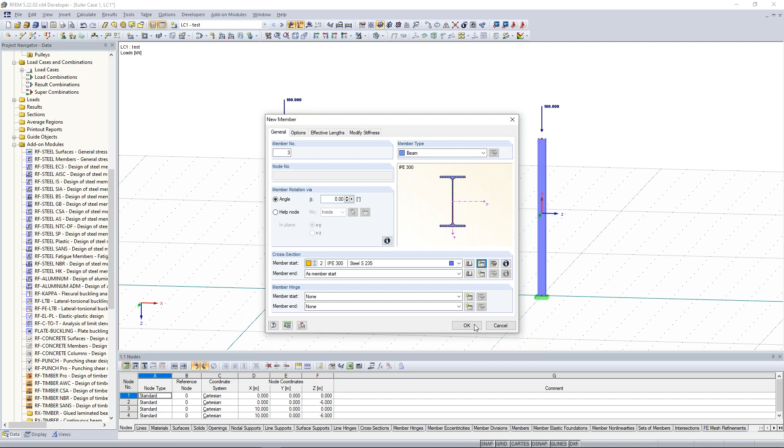Then I want to create a girder here from the left to the right column. So again, I create a new single member. I create a new cross section, in this case an IPE profile should be a height of 300 millimeters. Click on OK. Then I create this beam from the left to the right, and I have my girder here.

Good. Then I make the same thing. I calculate everything, and then we watch together, first of all, the internal forces, and also then the critical load factors.

Good. So first of all, we are going to watch the normal forces. I think they are clear. So in both columns, you get a normal compression force of 100 kilonewton. Bending moments, we don't have any bending moments. I think this is also clear because we don't have any horizontal forces and also no shear forces.

Good. When I want to see the nodal supports, I can watch it here by clicking support reactions. I see the vertical forces of the supports. Yeah, good. But this is not so interesting because I think that's clear.

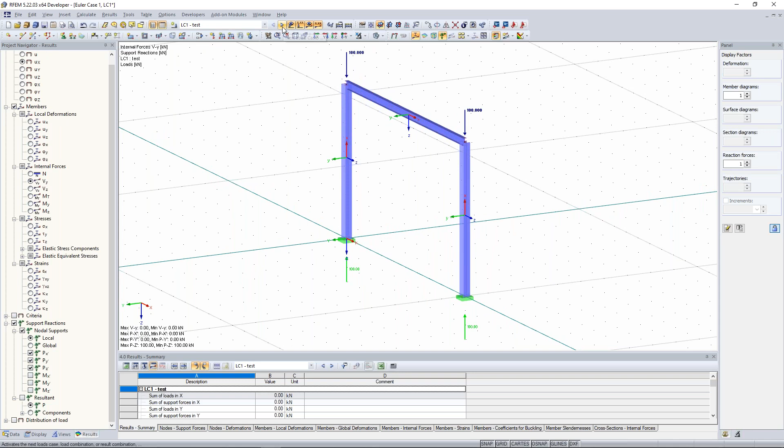But in reality, when you have cases like this, it's not so good because you have a form that buckles out of this plane. In reality, you have some supports that would hold this whole thing in order not to have this buckling form out of the plane.

And when you look at a whole 3D structure, you have additional beams along that side, and then you wouldn't have this eigenform. So maybe in order to consider that, you can add an additional nodal support.

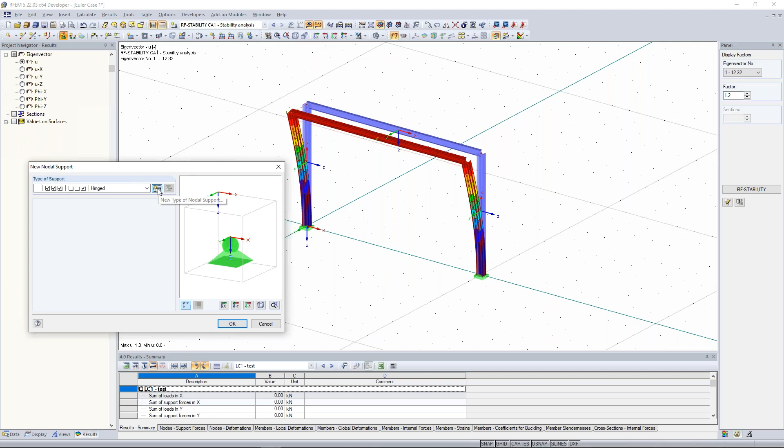So when I put it here, a new nodal support, I want to block the deformation at these nodes out of the plane. I have to create a new nodal support and activate the displacement uy, and then the displacement will be blocked in this direction, and forces could happen.

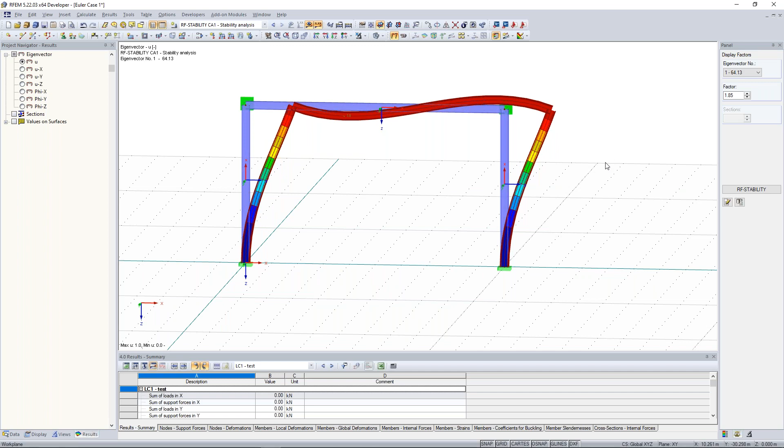So I choose the nodes here, and now watch our new buckling cases, our new eigenforms. Now our first eigenvector is this one, showing a buckling in this plane. This is also what we know from the structural analysis, from the study, because we calculate it in a plane. So much for the frame.

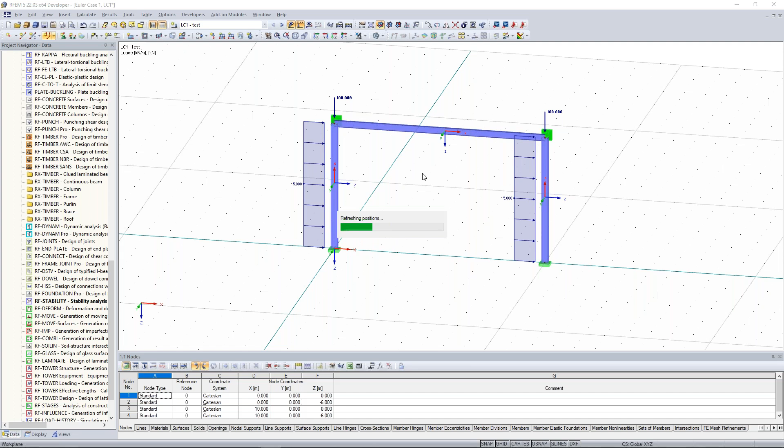Maybe I open a new program where we have a structure. I hope we have one somewhere. No, we don't have any. Here we have one. And maybe you mean also the wind generator. It's very easy to do that.

Here, with the help of the tools, we have the possibility to generate loads very easily. Here we can say wind loads, and then choose vertical walls or flat roof, something like that. In this case, we have the vertical wall with roof. Then choose the right standard. In this case, I choose the Eurocode.

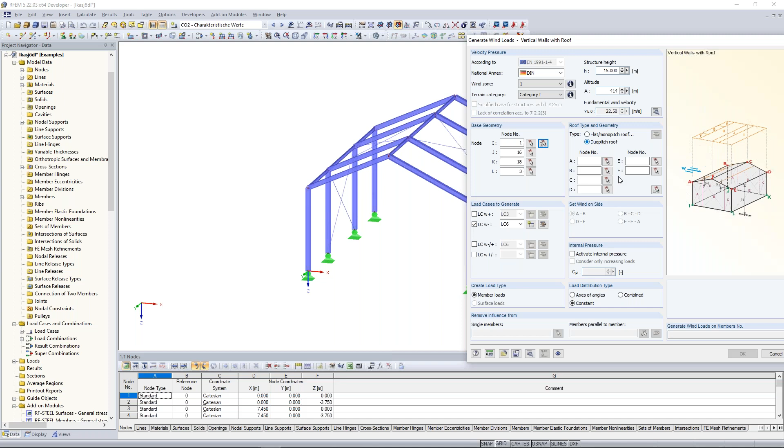And then with the help of this bitmap on the right side, you can easily pick up your base geometry. So I do that. I click on this base geometry, and then also my roof type and geometry. So I go from there to there to there to there, and then I have to choose the right load case, and then I can set the wind on which side. In this case, I want to have this on that side. I can set the height of the structure, also the wind zone, terrain category, and so on.

Then I say okay, and I have the different wind pressures and so on. I can show it separately like that.

Someone is asking if we can show a reinforced concrete beam. Yeah, of course.

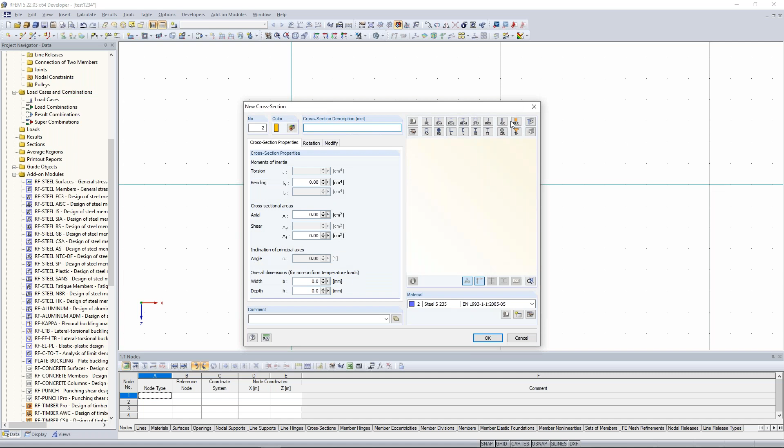I'll make a test example here. When you want to do calculations with reinforced concrete, you have to use one of our add-on modules. So first of all, create the beam, choose a rectangular beam, put some coordinates there, choose also the right material - this is important - and then create your beam, 10 meters long. And I need some supports, of course, I put 2 supports. And then also the loads. Sorry for taking some time.

Yeah, good. And now you can calculate it. You get your internal forces.

Then use the add-on module RF Concrete Members. When I open this add-on module, you can preset your ultimate limit state, what you want to design and according to which standard. Also the materials, here you can change some settings, cross sections, supports. And then you can consider your reinforcements - what do you want to use as rebars, which diameter should they have, and a lot of other stuff.

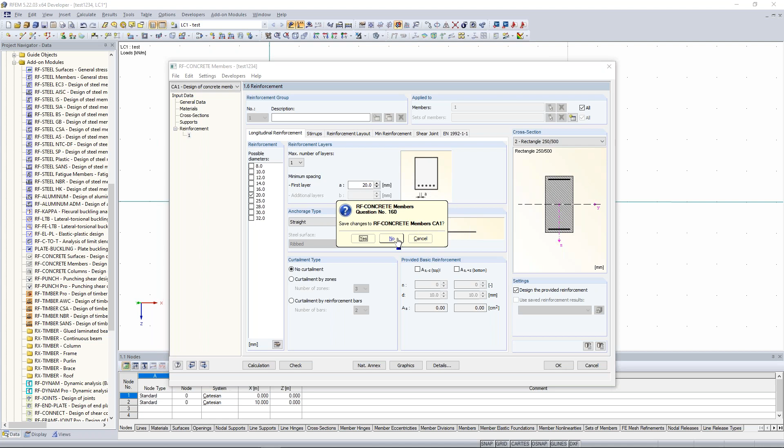It would take a lot of time to do a single design of a single beam. But with the help of the add-on module, with Concrete Members, you can calculate these beams here.

Next question: please throw some light on geometric and material linearity. Can I see the question? Which time? 12:02, 5 minutes ago. Material linearity, okay, I understand.

As I said before, we calculated these systems first with the different linearities, so the method of analysis. We have the geometrical linear analysis and also the second order analysis. The geometrical linear analysis, what does it do? I make the equilibrium of the whole structure at an undeformed system.

And the second order analysis, or the P-delta method, says I make the equilibrium by calculating the forces and the internal results at a deformed structure. This was also the point where I showed you the additional bending moment.

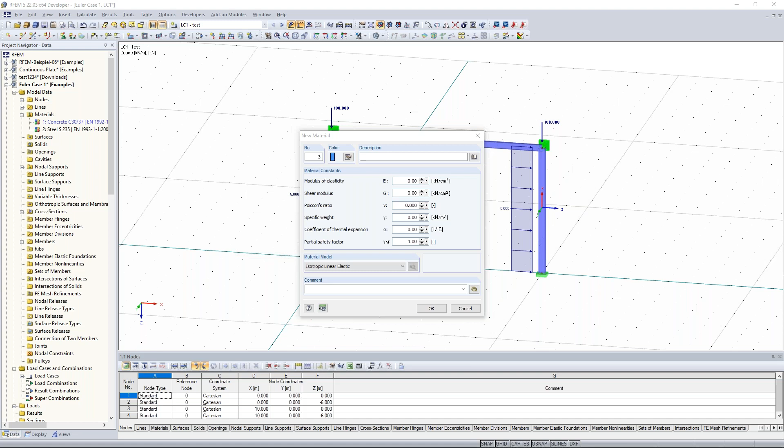Okay, Praxitelis, any new questions? We got many questions that are not that relevant to this training, do you want to answer all of them? For example foundation analysis or seismic loads? Yeah, these are questions not really referring to this training. I would rather answer questions which rely more on the general part of RFEM. But horizontal loads, what do we do with? Maybe you pick up some questions which rely more on that basic training, but we will answer you later.

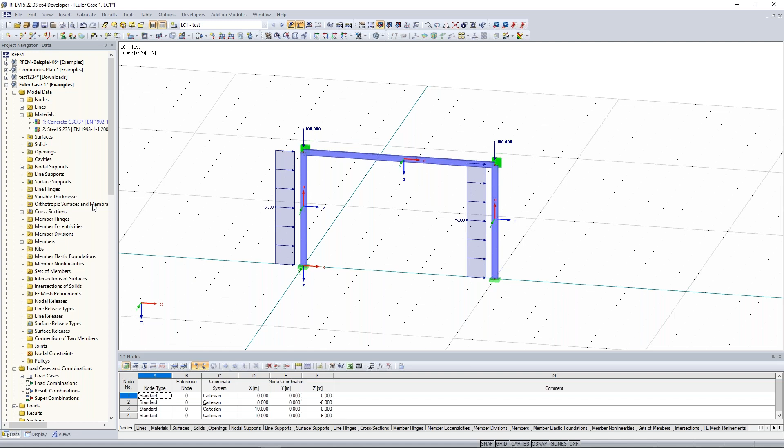Here you can identify identical nodes or overlapping members and so on. And for those who ask about errors concerning critical load factors, with the help of RF Stability, you can calculate the different buckling cases, and then you will also see where the problem of your structure is.

I also have a very good FAQ concerning unstable systems. I have to look it up. Wait a moment, I have it here. And I will post it to the chat.

So if someone gets the error 'my model is unstable,' what could be the reason? I would recommend this article, this FAQ. I show it to you here. There are different checks to do. I created also this article. First of all, you have to check your model with different options of model checking.